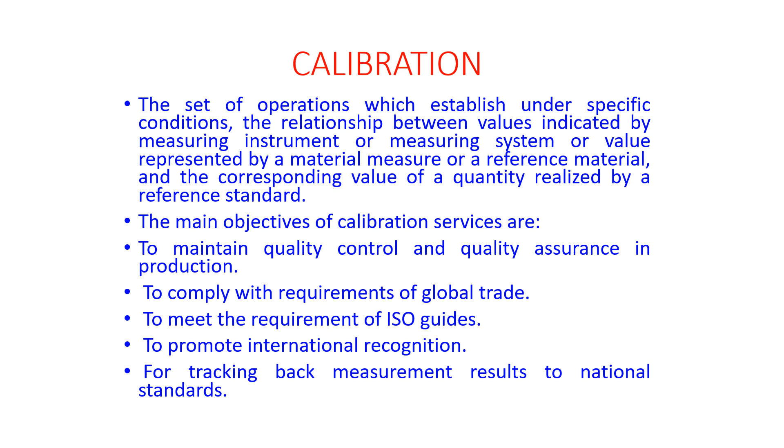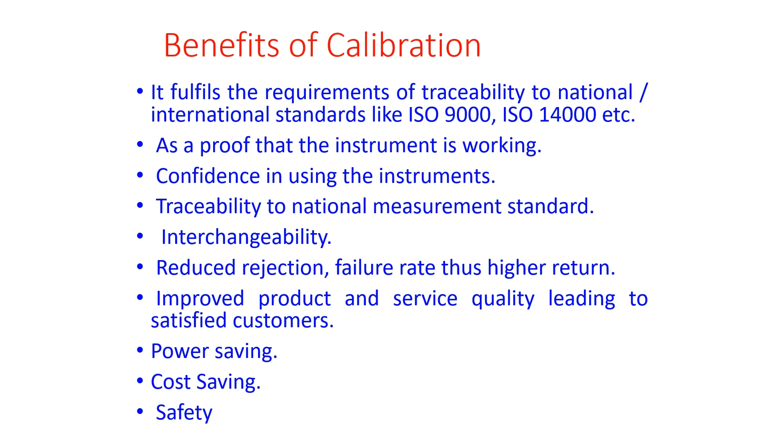The benefit is, if the instrument is calibrated, it is proof that the instrument is in proper order and working properly. It increases the confidence of using the instruments. In the production center, if you use calibrated equipment or instruments, it will reduce the rejection and failure rate, resulting in higher productivity and higher return. It will result in power saving and cost saving, and also better safety.

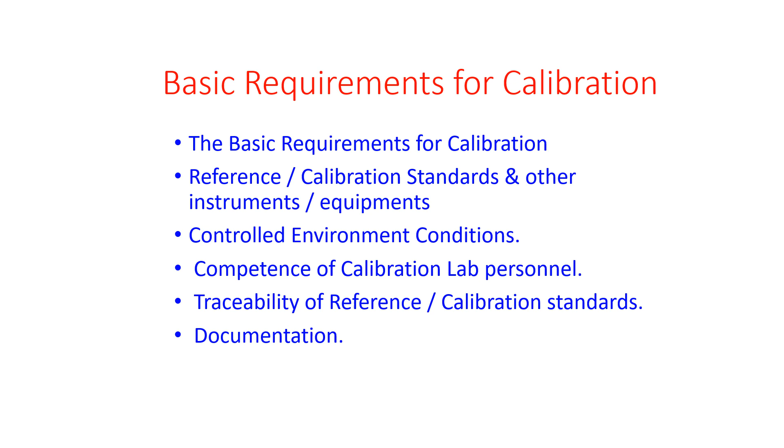The requirements for calibration are reference or calibration standards and other instruments and equipment, controlled environmental conditions, competence of calibration lab personnel, traceability of reference, and documentation. These are the basic requirements of calibration.

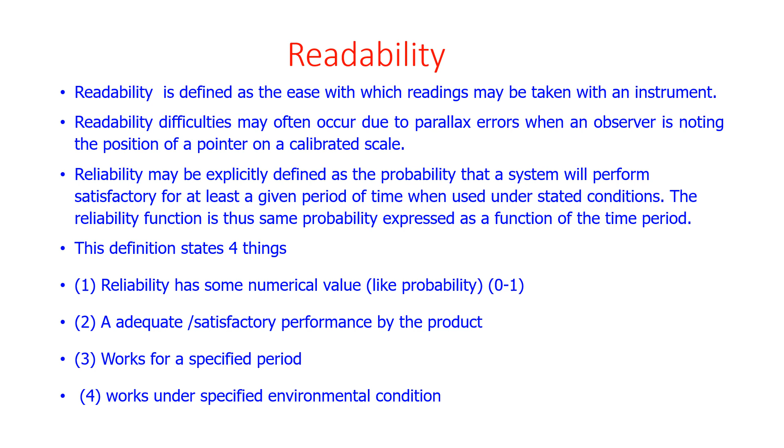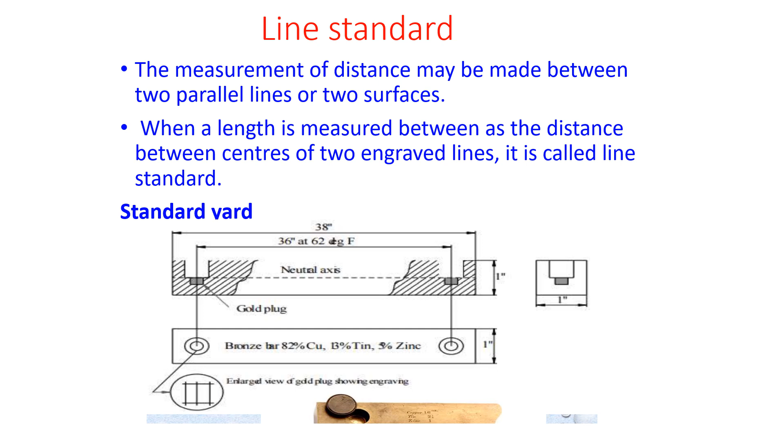Yard: a yard is made up of a one inch square cross section bronze bar and is 38 inches long. The highly polished top surface of these plugs contains three transverse and two longitudinal engraved lines lying on the neutral axis.

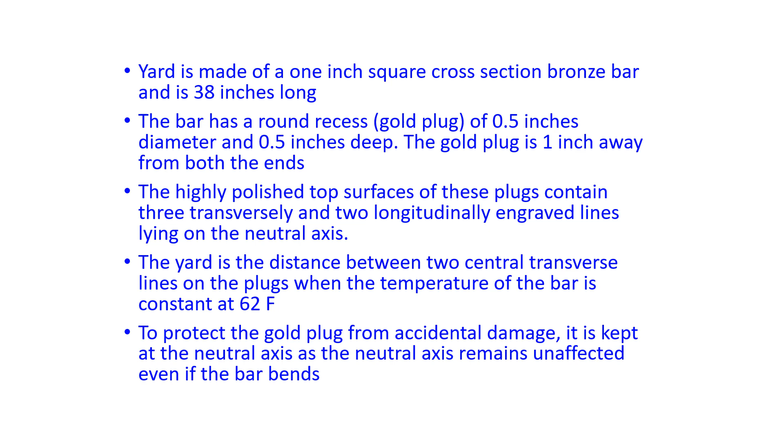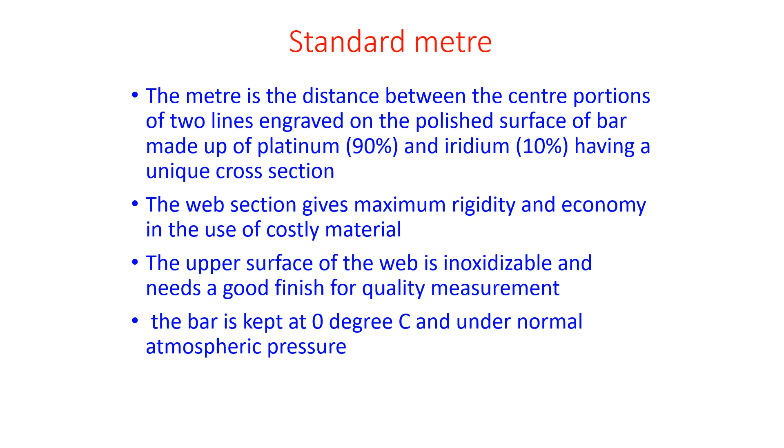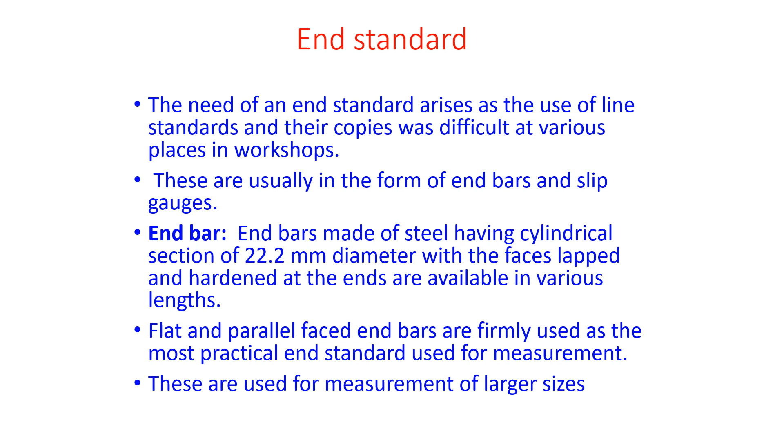Slip gauges, as we know, we come across in many places. A slip gauge is nothing but a rectangular, hardened, stabilized high grade steel block. The length of the slip gauge is strictly the dimension which it measures. The blocks, after being manufactured, are hardened to resist wear and are allowed to stabilize to release internal stresses.

A combination of slip gauges enables measurements to be made in the range of 0.0025 mm to 100 mm, but in combination with end bars, a range up to 1200 mm is also possible.

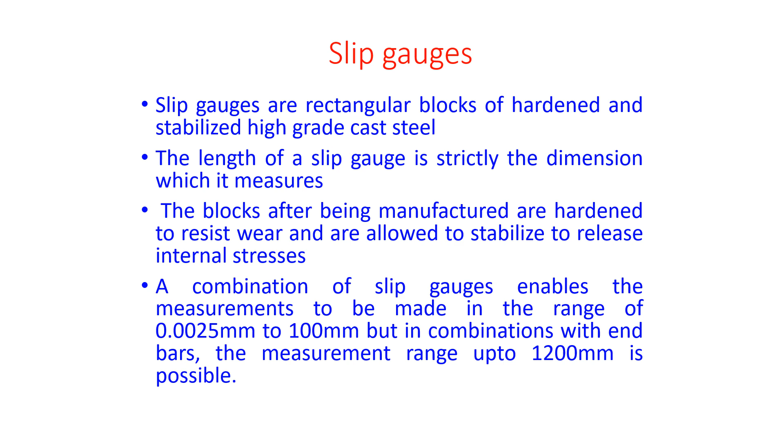Another standard is the wavelength standard. Line standard and end standard are physical standards and are made of materials that can change their size with temperature and other environmental conditions. So in search of a suitable unit of length, the wavelength standard was established to replace the end and line standards. Normally, laser is used as a primary level wavelength standard.

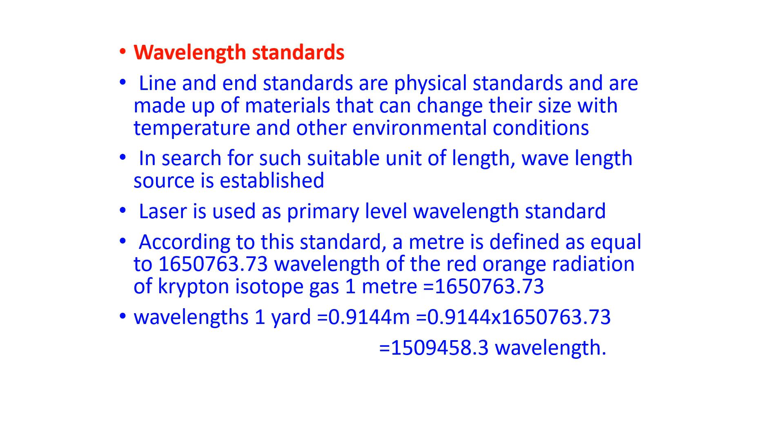According to this standard, a meter is defined as 16,50,763 wavelengths of the red-orange radiation of krypton isotope gas. That is equivalent to 1 meter. Then a yard means 0.9144 meters. So if you multiply, we get 15,09,458 wavelengths. So 1 meter is 16,50,763 wavelengths, whereas 1 yard is 15,09,458 wavelengths. That is the wavelength standard. So there is no physical standard for the wavelength standard.

So with this, I close this video on calibration, wavelength standard and line standard.